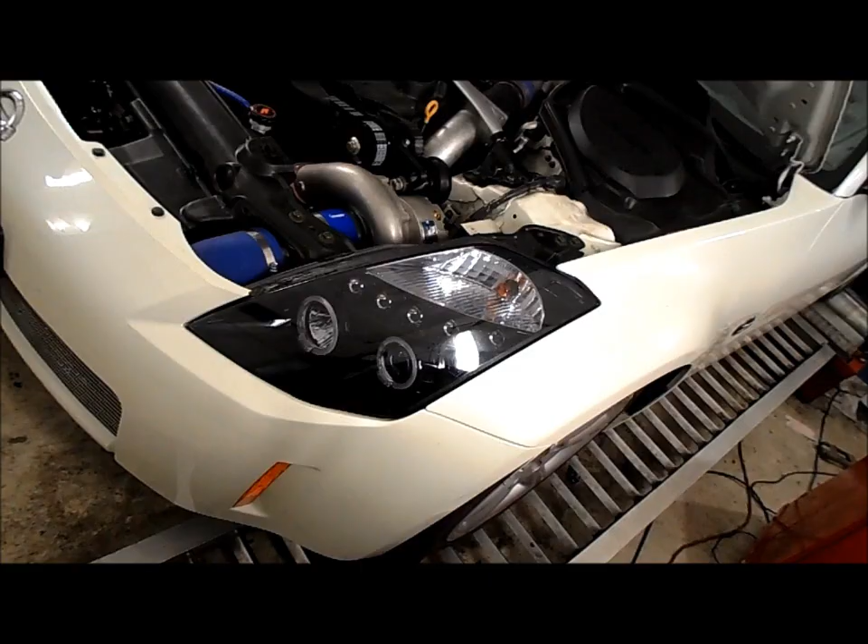Hi, it's Chris from 5252 Motorsports, and today's bit of lunacy is trying to get over 500 horsepower out of a completely standard Vortech supercharger kit.

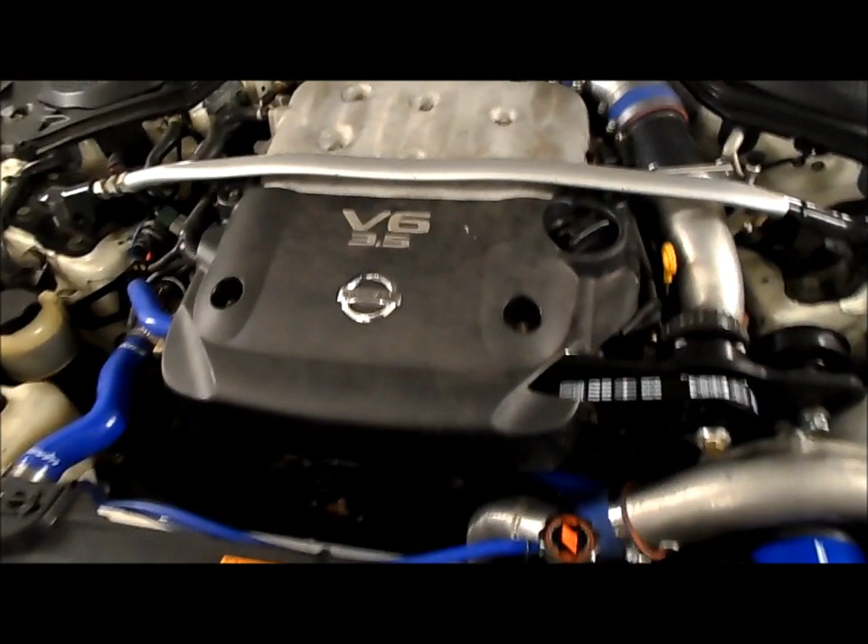So what we ended up doing here is, a while ago we installed the Vortech kit and built the VQ up with the usual CP pistons, Eagle rods, all the ARP stuff, some good head gaskets.

And we ran at about 395 wheel horse for a while on the stock pulley. So a lot of guys online have said you got to upgrade the blower to get over 500. So we kind of took it upon ourselves to see if we could accomplish this mission.

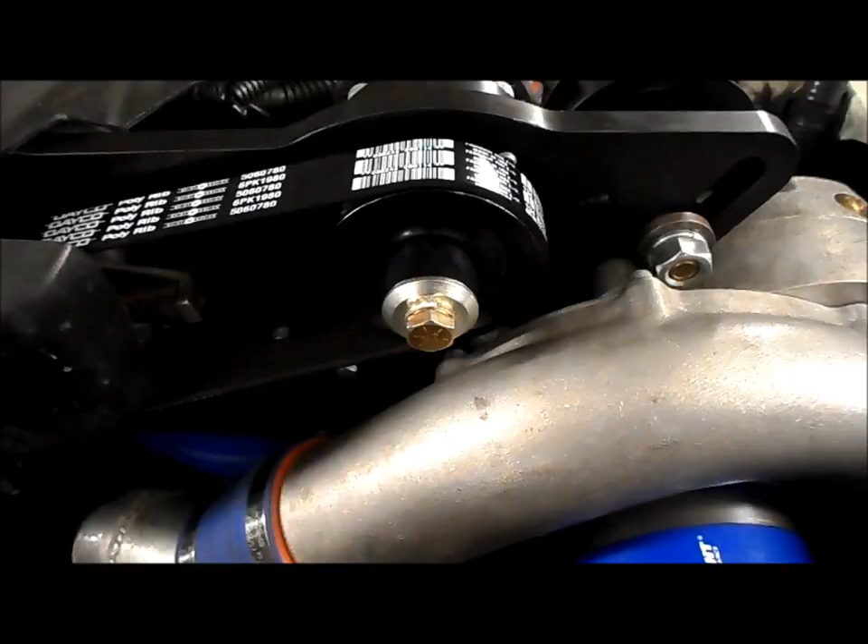So we ended up with a 2.8-inch blower pulley, which was sort of the only big change we made to the car. The other thing was the Vortech air cleaner. No offense to Vortech, but packaging-wise, they were sort of limited to basically putting something about that big right on the end of the supercharger. It might be fine for a 1.4 liter, but this is 3.5 liters of VQ.

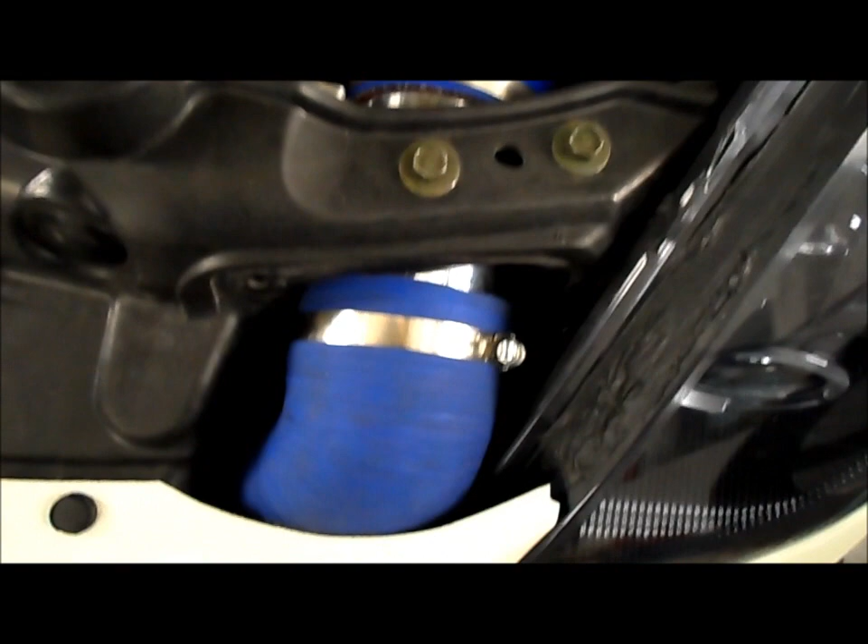So we did one dyno pull before with no air filter and ended up picking up 30 wheel horsepower. So we figured, you know what, we're going to need more filter. And we ended up building a custom intake assembly which hides right behind the grille and the front bumper, just on top of the intercooler. So we wanted to see how well that was going to work.

And I mean, it's a real nice simple car. Stock wheels, white, modified headlights are about the only thing that give it away. It's got a set of headers, possibly a set of test pipes in it. Decent build. So let's see what it made.

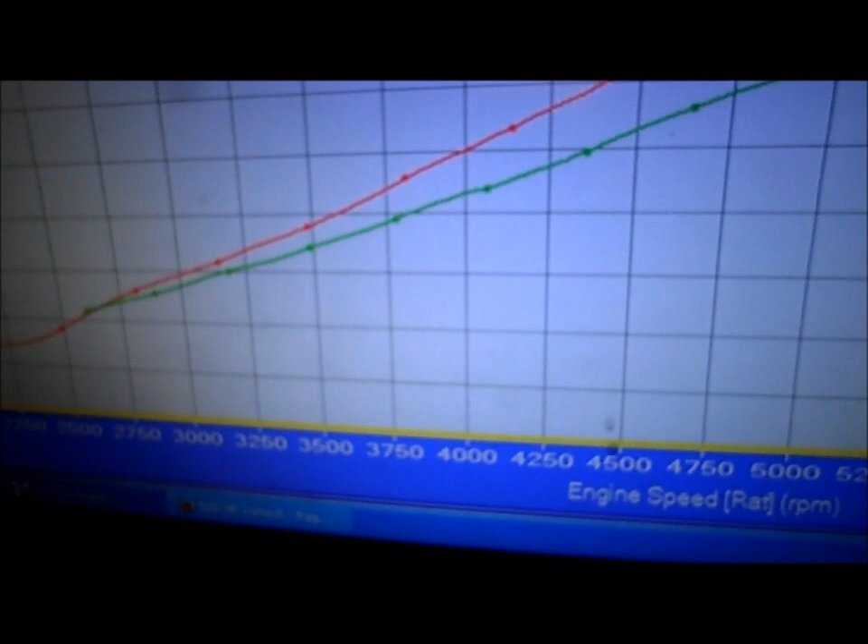So as you can see, we achieved our goal here. 395 is what it left with, and we're now at 516 horse. And it's right from the bottom end up, and it just keeps getting better and better and better.

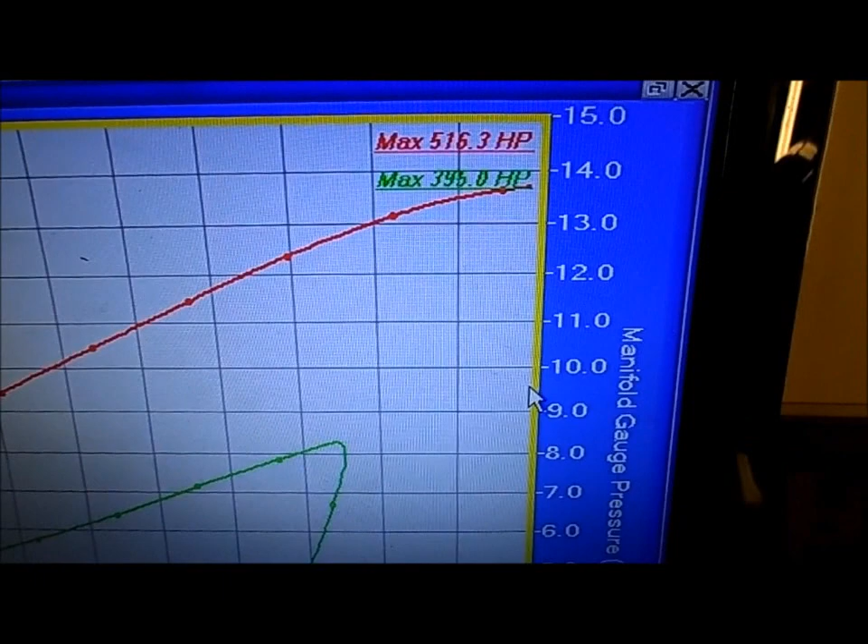So you can see the stock Vortech kit comes in around 8.5 pounds, and we're touching just over 13.5. But the nice thing about the pulley, and what you're going to see after this is the torque curve, is it just keeps building boost a whole lot earlier. This motor's 8.5 to 1, so it's totally going to put up with a little bit of added stress down low.

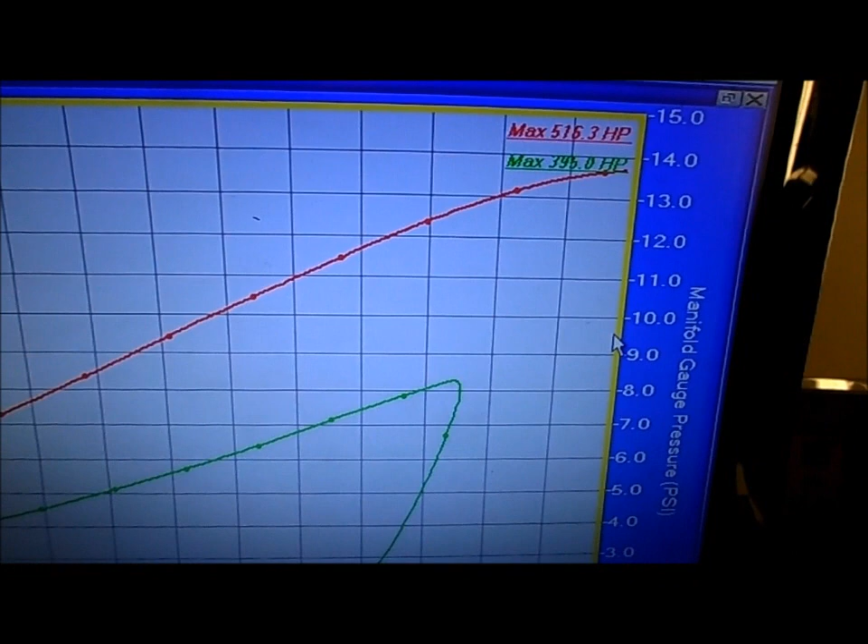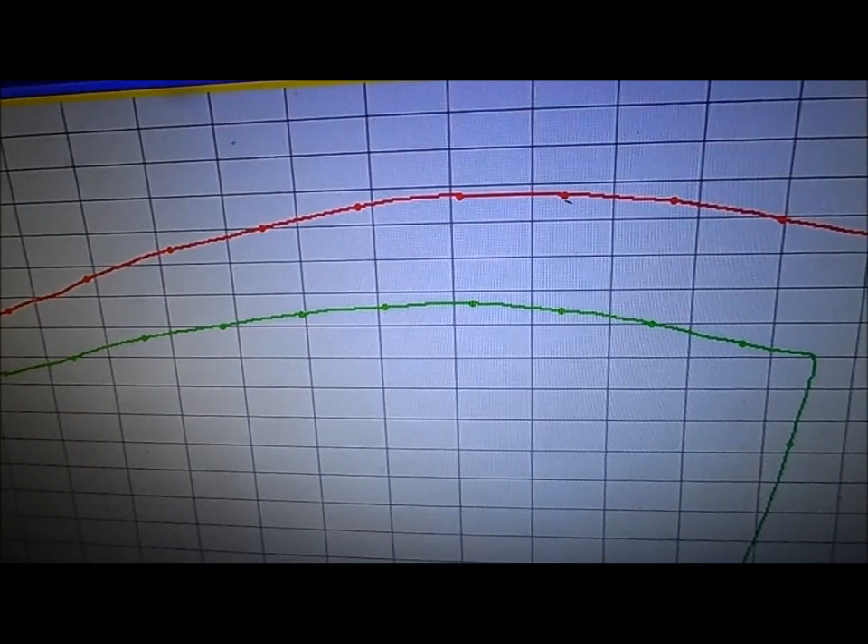So let's take a look at torque. Pretty impressive torque, especially for a centrifugal blower. We hit about 418 pounds, up from the previous best of just over 340.

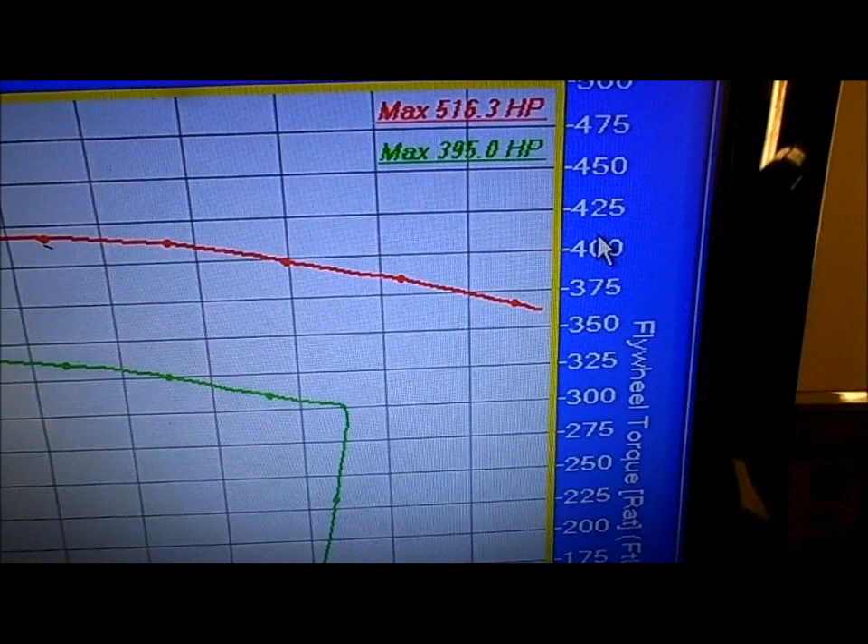But I mean, that's a curve. Starts right from the bottom, keeps going up. We run at a peak at about 6,000 on the stock head, and it's just a gradual slope away. So this is going to be a monstrously quick street car.

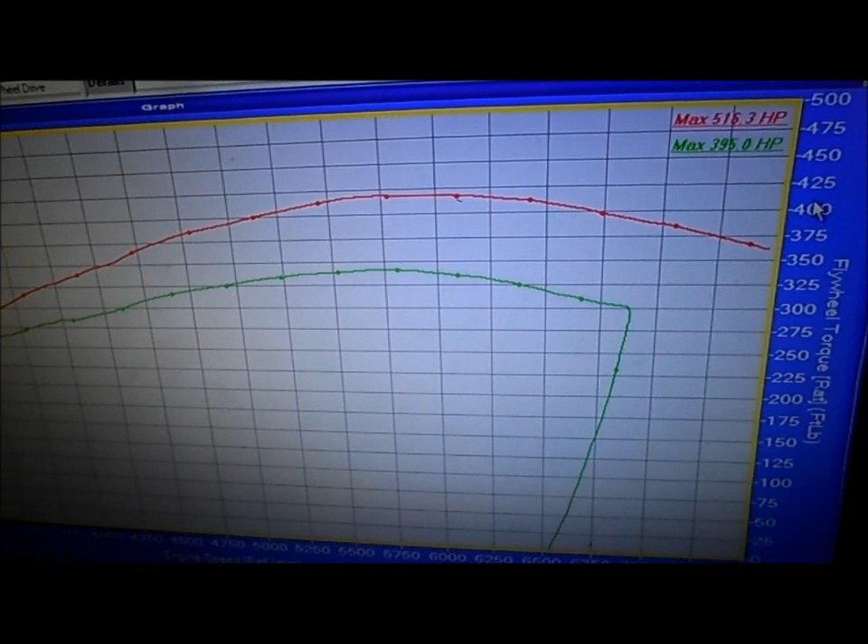Nice thing about centrifugal blowers too, basically, as opposed to having all the torque of the turbo kick in at lower RPM, these guys sort of act like an amplifier to the natural power band. So it's faster, and it just keeps getting faster the harder you step on the throttle.

For this car too, we're actually using Vortech's first generation 350Z system. So this one lacks the throttle control that the newer system has and a couple of the other bells and whistles, but it's still got functional intake cam target.

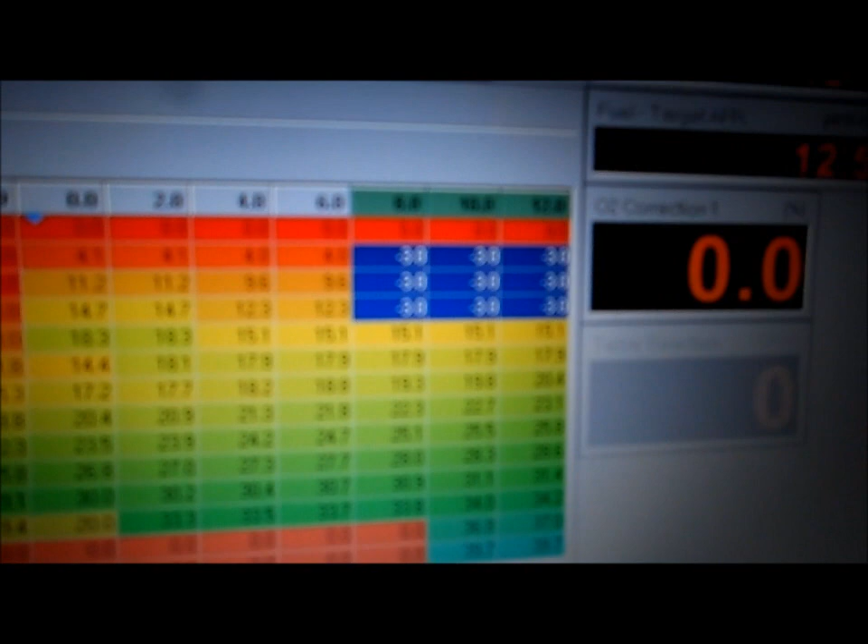So we ended up ramping up the cams fairly decently in the bottom end, and then we realized we were sort of at a power cap. So with the Brian Crower Stage 2s, we ended up dumping everything to -3, which was about its happy place up top. And the thing just kept picking up power until the 516 was achieved.

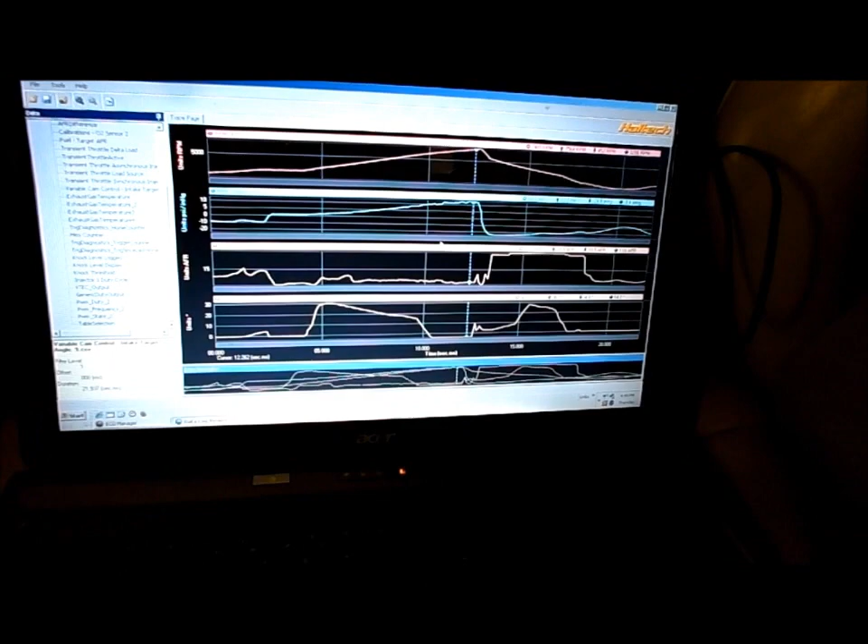Nice thing about the Haltech too is we're data logging everything with one of the CAN widebands, logging the boost, the air-fuel ratio, the cam targets, knock, the entire nine. So really happy with the system, even though now it's 7 years old and they've got an upgraded version. It's still doing the job.

So all in all, we're pretty stoked on the Nissan, because these cars run about, usually on our dyno, 245 wheel horse stock. This guy's doing more than double that. It's going to be a serious sleeper and a lot of fun for the customer.